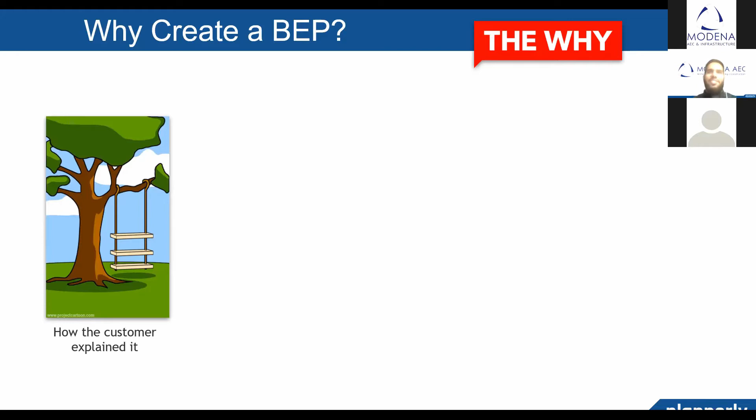So let's start with the why create a BIM execution plan in the first place. Unfortunately, as many of you know, this is how projects usually work. They consist of multiple teams, usually with different views of what project success looks like. So how the customer explained it, how the BIM consultant described it, how the project was actually documented, and what was installed. And finally, what the customer actually wanted was just a tire swing.

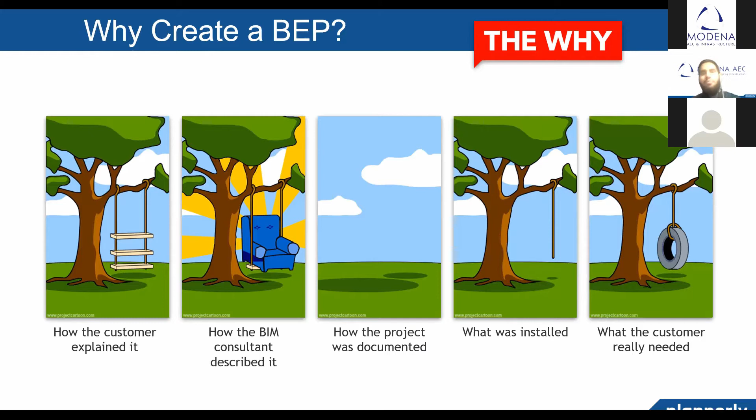So BIM execution plans, or your BEPs, are needed to help teams find a common agreement between multiple teams, multiple firms, so that everyone can follow the same standards and processes required to get to the right outcome. Some people have unrealistic expectations of BIM as well. We want LOD 500 plus COBie. Wanting everything for a BIM model may also not be effective.

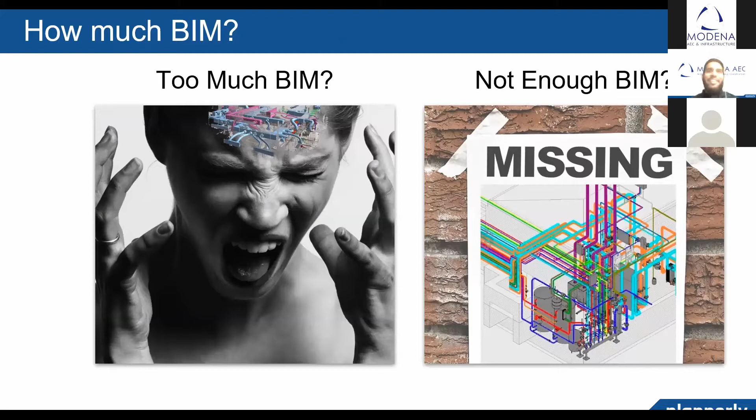You end up with either too much BIM, you're modeling too much, you got overlapping information, or you end up with too little, where the contract didn't define enough BIM, or nobody knew who was responsible for certain items, and we end up with missing information. And sometimes we get the owners or the clients going, what is this? I didn't pay for this. This isn't what I had expected.

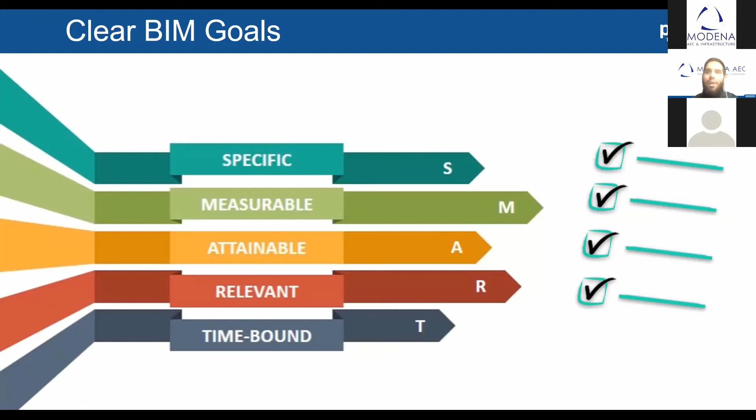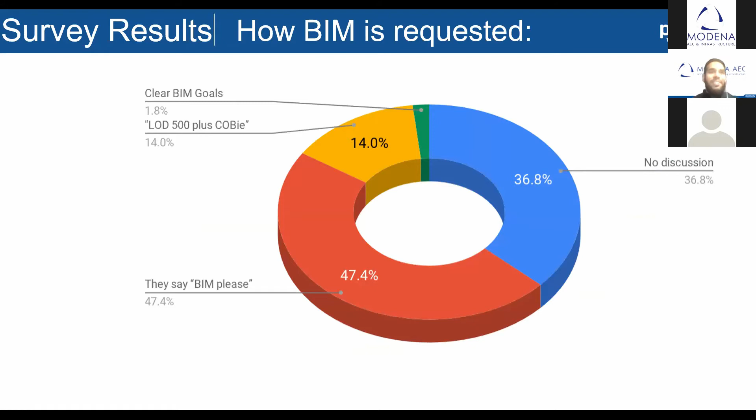So have clear BIM goals, make it SMART. SMART stands for specific, measurable, attainable, relevant, and time-bound BIM goals. However, some poll results point out that only 1% of projects actually requested clear BIM goals, and this is very sad. So we need to make sure, first and foremost, that we define our BIM use. What is the BIM use?

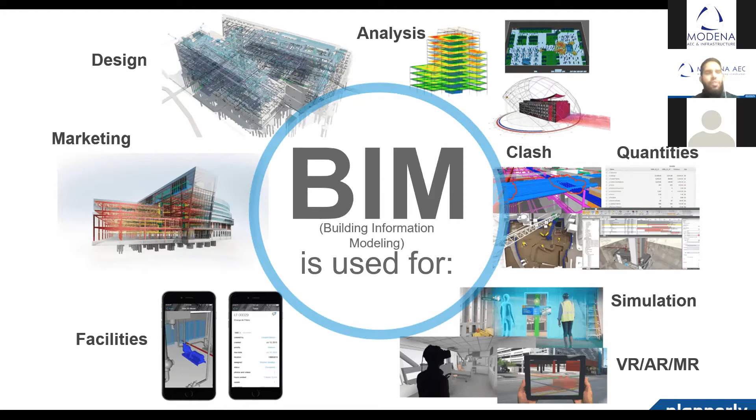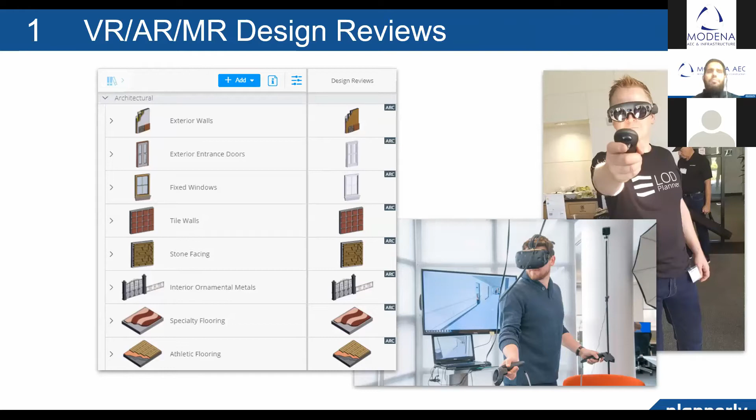There are many examples of what our models are used for, ranging from design all the way to simulation. So here are 5 examples. The first example is design reviews. We're seeing a lot more of VR and AR being used, and now we are asked many times by clients to model for this. Number 2 is for quantities or cost estimation. Making sure we're certain of the elements needed before we go and try and take off quantities is important, because missing quantities will be a huge problem.

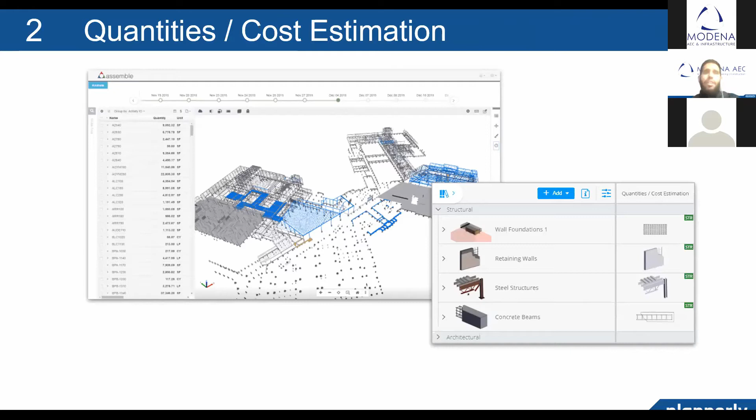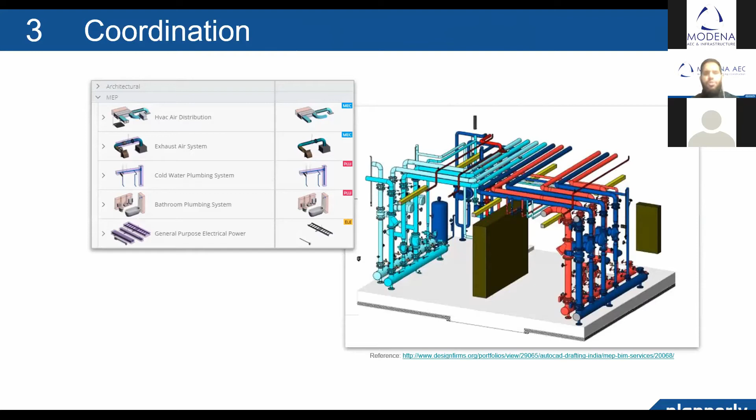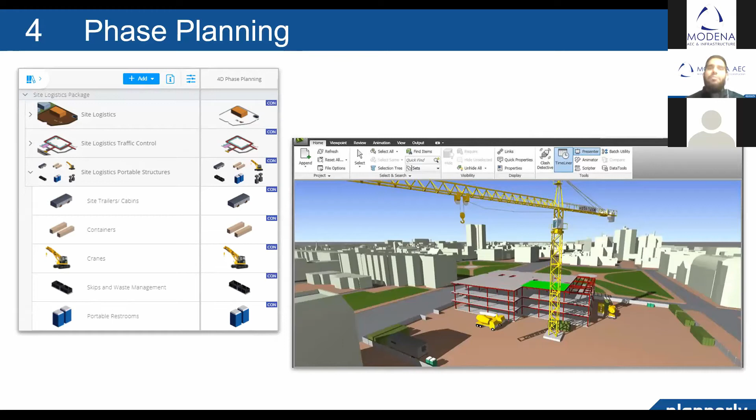One of the most common uses of BIM is coordination. It's very important to do coordination for constructability issues, for clash detection in the model before they get on site. And then phase planning. Understanding sequencing and 4D simulations, being able to see something virtually construct over time. So making sure we have the items we want sequenced and phased.

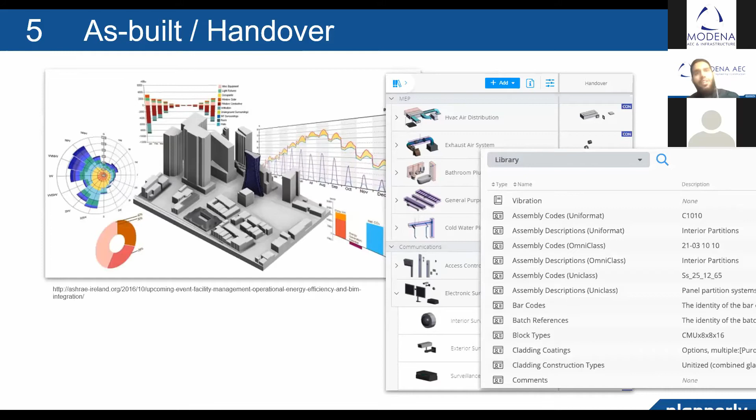And then there's as-built handover models. If we like to visualize the data and this Internet of Things, we need to plan out information that has already been constructed. So why is defining a BIM use or goal such a challenge? So let's go through this.

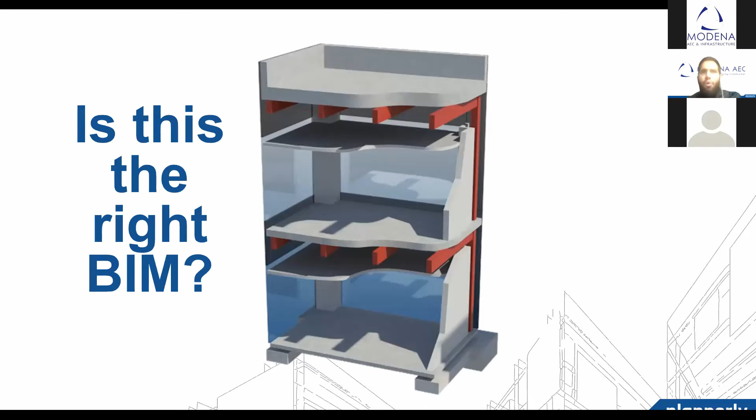Is this the right BIM? Is this the BIM you asked for? Fairly okay. There's walls and floors and ceilings and some beams. What about this? There's some glazing in there and some sort of layering on the floor, slightly more defined structural framing. How about this? Much more detailing and finishes. So which one is the BIM that you need? These are three different levels of BIM, different amounts of detail, elements, data, etc.

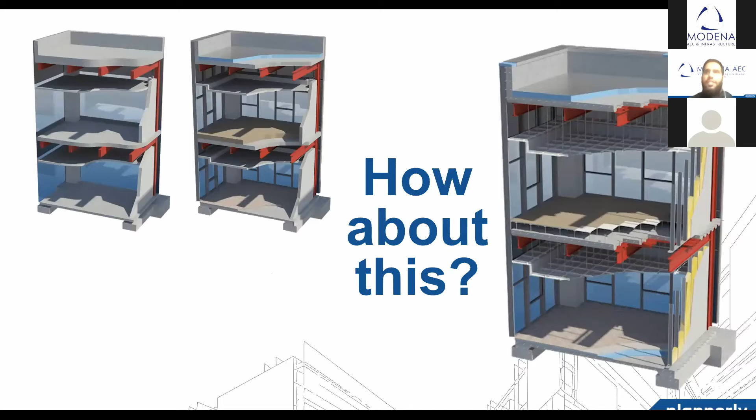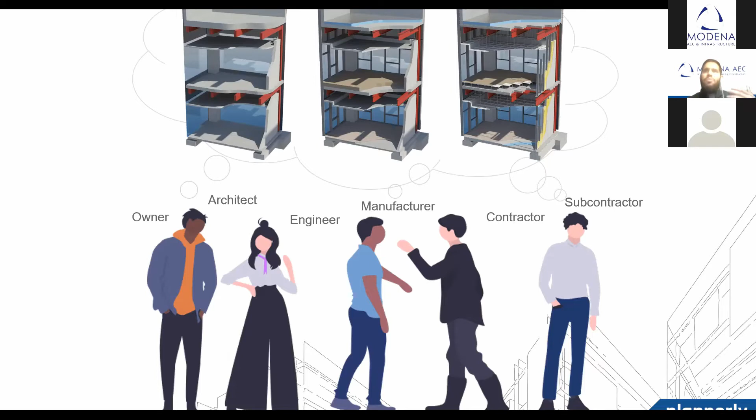The problem is that we have a set of stakeholders on a project, and they all have their own opinion of what BIM should be at certain points in time. Every one of those people will have a different goal and want to produce something that is more valuable to their company. Sometimes we just need to start off with some basic questions. Who, what, where, when, why, and how are some of the questions we need to answer across the many parties involved in order to get there.

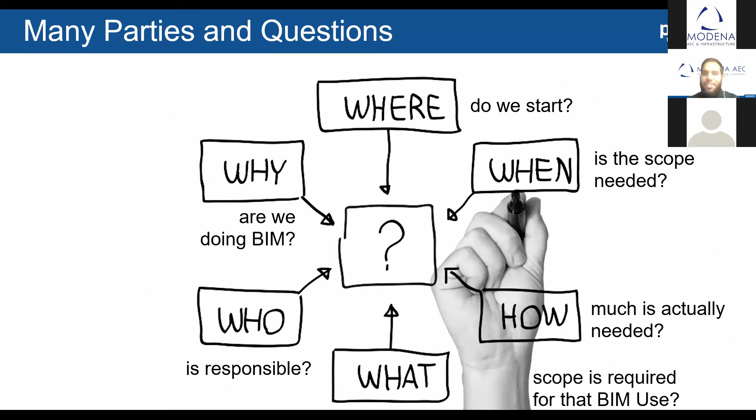Why are we doing BIM? Who is responsible for what? What scope is required for that BIM use? How much is needed? When is the scope needed? Where do we start? Start by defining the why. Why are teams creating 3D modeling in the first place? What are the most important BIM uses for this project?

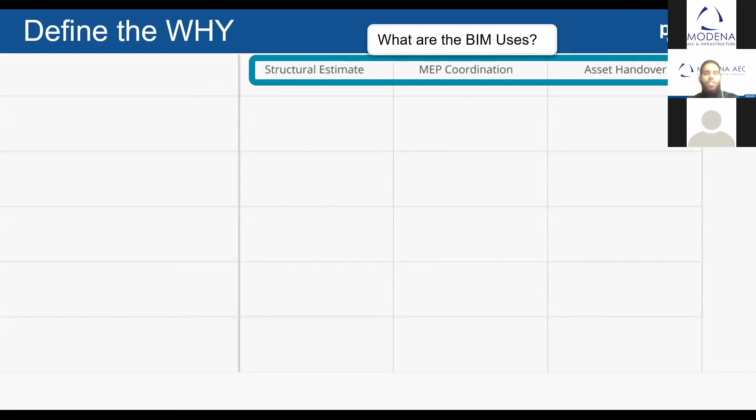What's the purpose of BIM? Is it for structural estimate, MEP coordination? Is it for asset handover? And then define the what. What scope needs to be managed on the project? What's the list of elements that we will need to be estimated, coordinated, handed over?

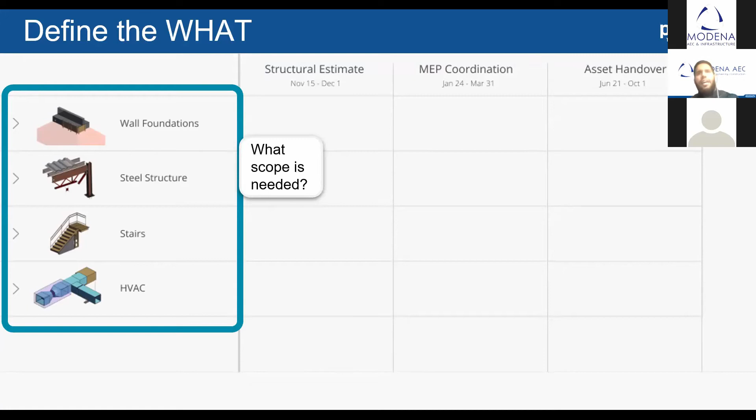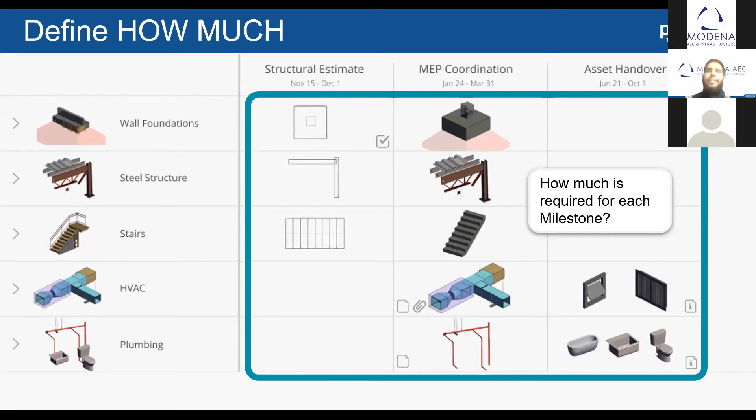Define how much. For each BIM use, teams must define how much BIM is actually required, how much BIM matters for each customer of the model at each stage of the project. And then define the required geometry, documentation, and information requirements.

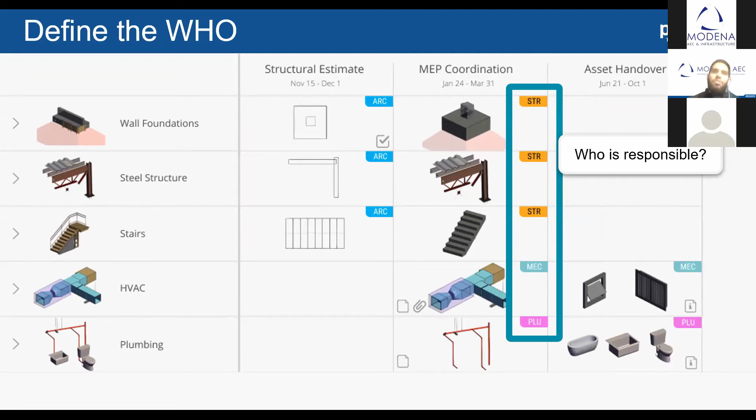We also want to define the who. Some of the most important parts are understanding when critical handovers of responsibility occur, like here for the stairs from the architect to the structural team. So knowing who is responsible and when is critical for project success.

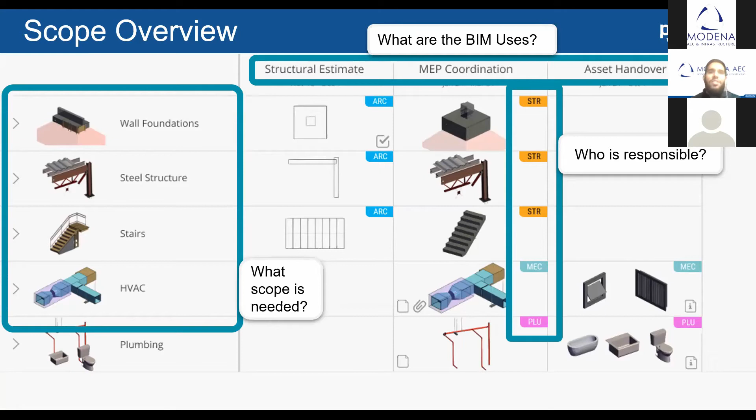What's needed for the perfect BIM scope? Well, answers to these questions reveal what's important, when it's required, for what BIM use or purpose, who's responsible, and what handovers are expected or agreed to. So a quick recap. Let's start with the purpose. Why are we creating a model in the first place? What is the scope required? How much is actually needed? When is the scope needed?

And who is responsible? We see a lot of teams responding well to a visual grid, not just the information or the accuracy or the geometry. It's a combination of all those. So we define what is required by whom and then be able to assign them. That helps us see the handover from one team to another.

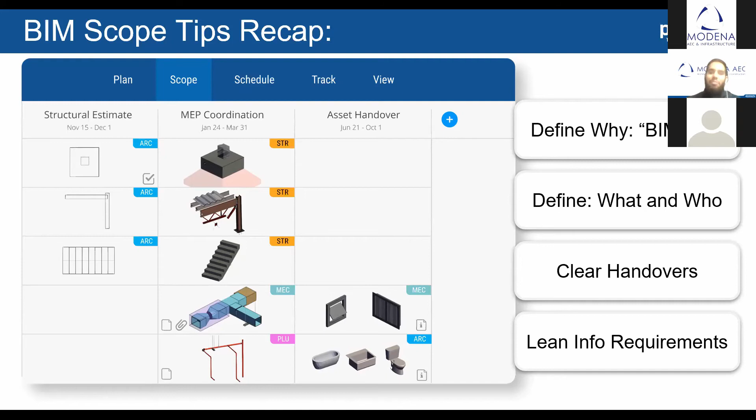We need to avoid certain things when it comes to drawing up a BEP. So things to avoid when drawing up a BEP with the client or the owner. Do not go on selling the BIM dream, saying how everyone is going to save so much money, how it's going to be a perfect, seamless workflow, instant ROI, etc. While it's good to sell this kind of stuff, sometimes you have to be more specific to the project.

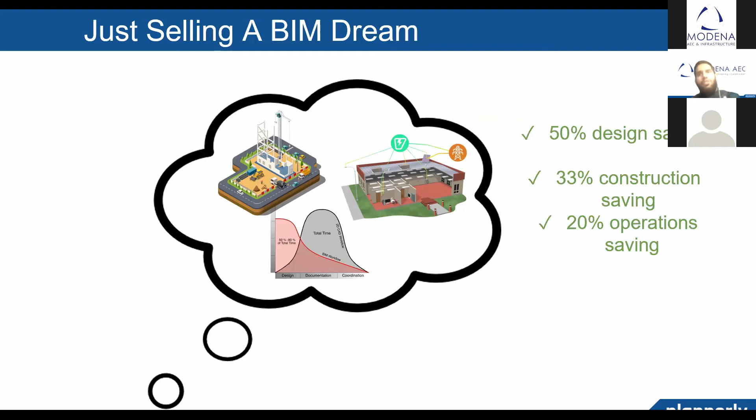And when you oversell it, the client or the owner tends to think that BIM is easy. Well, if you can change it once and it can update every other drawing, then surely we can have this and this and this. And they will probably go on to demand more and more, thinking everything will be easy. If you promise too early a lot of return and savings, then they tend to ask for everything, which in our industry is a crime.

So be specific on what you are delivering in the BEP and what the client needs, and be mindful of the time it takes to accomplish all those BIM uses, and make it clear with the owner or the client as well.

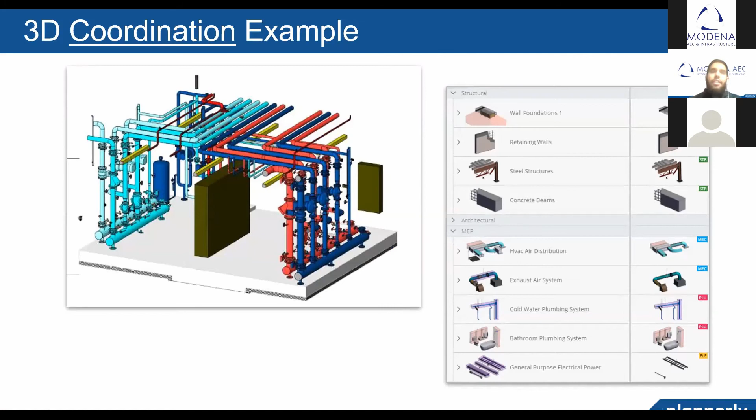Or maybe 4D phase planning, showing an owner an example from a previous project and seeing the amount of effort from scoping and seeing the output is really powerful, as well as showing the benefits, for example, sequencing and safety.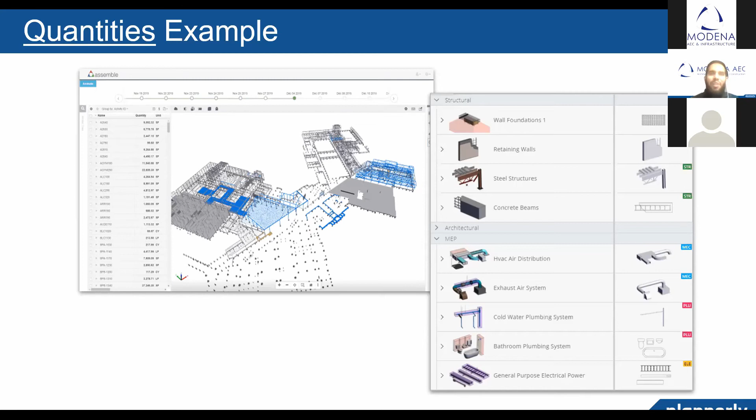A BIM developed cost estimate can help track budgets throughout construction, easier exploration of different design options and concepts within the appointing party's budget. And then we can quickly determine costs of a specific object. And then allowing the owner or client to be able to virtually walk through their building.

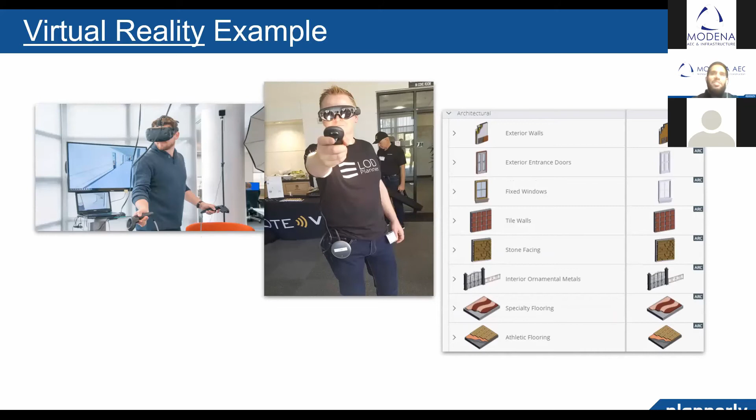So virtual reality examples. So taking that hardware to the meetings for them to experience it is very powerful and very well received. But it also enables them to understand the commitments, the scope, and everything required to get to that photorealistic feel. On things to avoid, do not get too technical when drawing up the BEP.

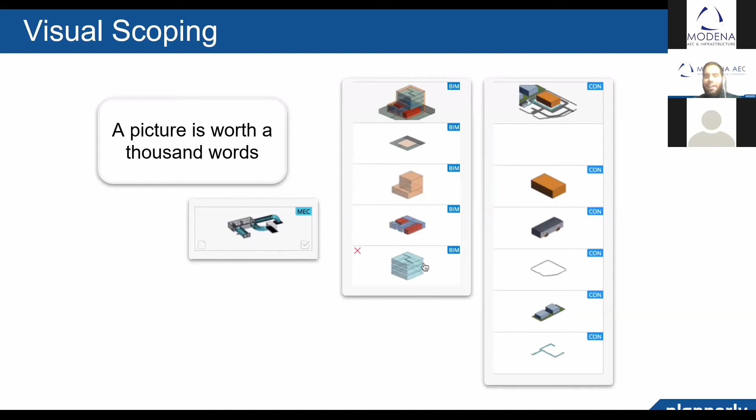And try to align it to what the client needs. So instead of using this BIM jargon of ours, try to use pictures. Pictures are worth 1,000 words. Clients and owners love it when you're visual. They love to see their building and how it's going to look. So use pictures to explain the scoping process instead of looking at an Excel spreadsheet or a long Word document. And this also prevents people from falling asleep on the table in the meeting as well.

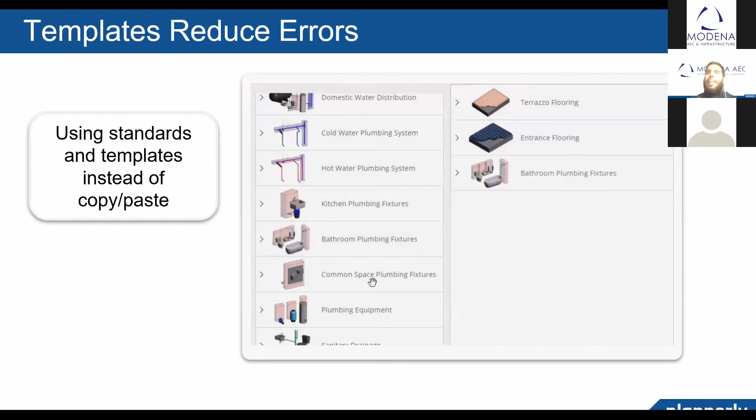So BEP templates can save time and reduce risk. So instead of copying and pasting things that you might not need, you can use templates and be selective. Every project is unique, and bringing in that risk is not good for the client and for their own company. It's a liability. So the trick is to keep those templates basic and be able to develop that workflow that you are putting into those templates.

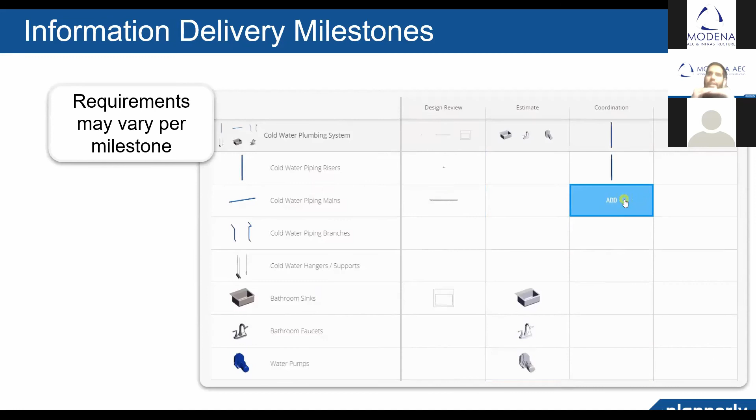Know that each BIM use can have completely different requirements. So you need to have the ability to define information, delivery milestones, and change what is required on each milestone. So you know that you don't need a high level of detail in design reviews, only a certain amount of geometry and cost estimation, and focusing on the actual coordination elements that will be needed. So delivering the correct level of geometry when needed and not forcing a high level of geometry throughout the process.

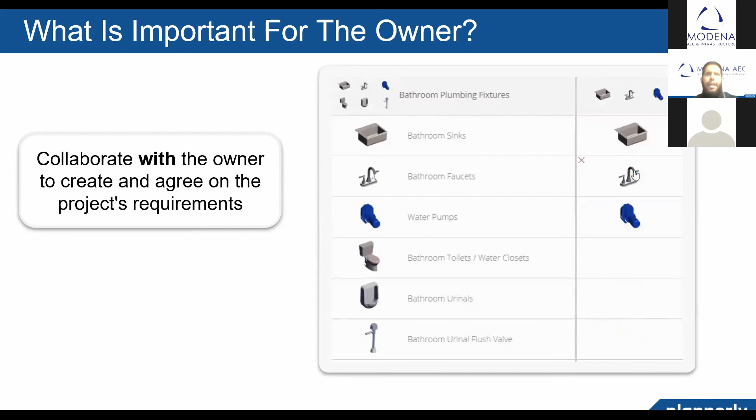Again, aligning expectations is everything. So what is important to the owner? Collaborate with the owner to create and agree on the project's requirements. So invite the owner to help with the scoping, get them engaged so they can see the processes and the effort that goes into it.

Remember, lean information requirements will save time and please the owner enough so that they would want to work with you again. And being able to define project-specific information requirements is part of this. Having a library of the information that you would use across all of your projects, but also being able to just add the ones you need for a specific project that you're working on.

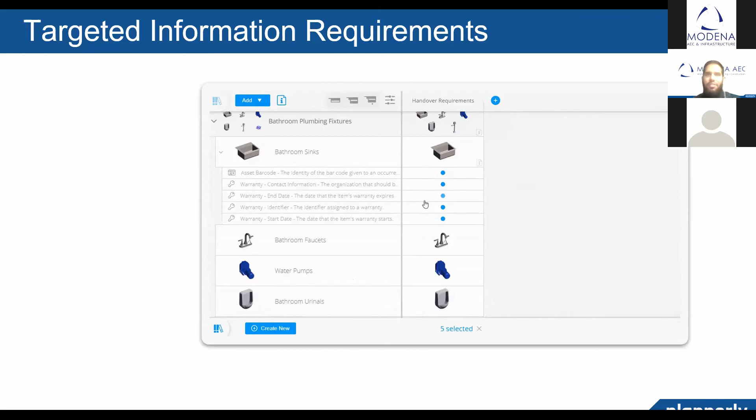Targeted information requirements are more achievable. So have a clear list of what information is needed and by when. So a targeted information approach, targeted requirements, instead of asking for everything all the time. This will save time and waste on deliverables. Waste of money, waste of time.

The agreements must also be printed in a contract. So being able to, in the meeting, click print and say, this is my handover documentation. This is what we agreed to. These are all the information requirements we agreed to. A nice, rapidly printed and formatted PDF document.

Collaboration will help achieve BIM compliance. So bringing everyone along from day one, adding them to the team, they can help build this document. And then you can go and check and manage and verify visually before you publish a model for use. It's a waste of time having these meetings and not sharing this information with the rest of the individuals who are going to be doing the work.

It's a waste of time having that 2-hour meeting and then telling the client, I'll get back to you. Instead, now you have the ability to then and there print and send everything that was agreed on in the meeting to everybody involved. By following these steps and advice, you will be well on your way to building a clearly defined and goal-driven BEP, making your project awesome.

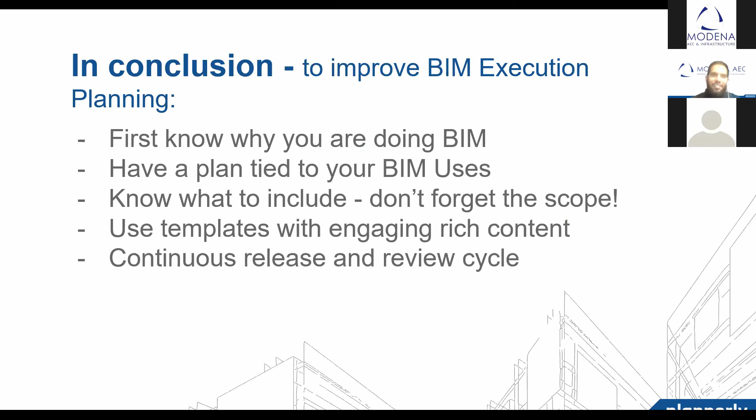So, in conclusion, first, know why you are doing BIM. Have a plan tied to your BIM use. Know what to include. Don't forget the scope. Use templates with engaging, rich content. Have a continuous release and review cycle.